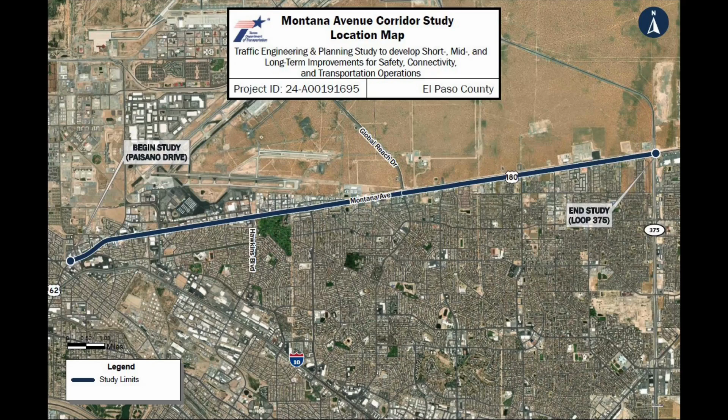Welcome to our first public series for the Paisano Drive and Montana Avenue corridor study with virtual and in-person options. We appreciate your interest in the study and thank you for your participation. The public meeting series has been convened to share study data and preliminary recommendations for the corridor and obtain your input. Please take your time and look through the public meeting material, and don't forget to send us your comments by phone, email, online survey, or mail with the provided forms.

Your input on the proposed improvements is valuable and will help benefit the community. Thank you for shaping the future of Paisano Drive and Montana Avenue.

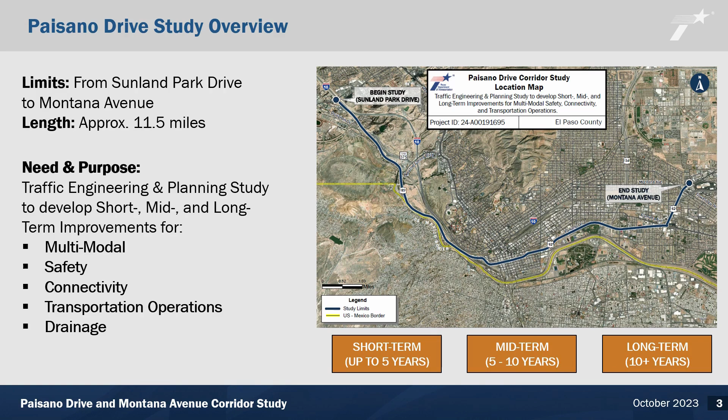The Paisano Drive study corridor extends approximately 11.5 miles from Sunland Park Drive to Montana Avenue, passing through downtown El Paso and under the Bridge of the Americas. The purpose of this study is to develop short, mid, and long-term improvements for multimodal, safety, connectivity, transportation operations, and drainage. Short-term refers to recommendations that could take up to 5 years for implementation, while mid-term refers to recommendations that could take 5 to 10 years, and long-term refers to recommendations that could take more than 10 years.

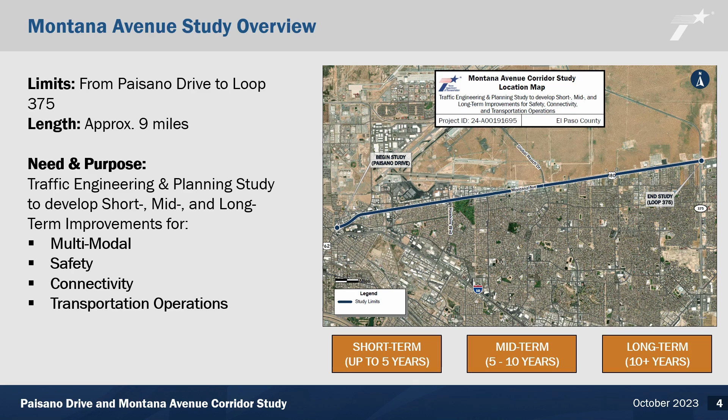The Montana Avenue corridor study extends approximately 9 miles from Paisano Drive to Loop 375 at Joe Battle. The purpose of this study is to develop short, mid, and long-term improvements for multimodal, safety, connectivity, and transportation operations. Short-term refers to recommendations that could take up to 5 years for implementation, while mid-term refers to recommendations that could take 5 to 10 years, and long-term refers to recommendations that could take more than 10 years.

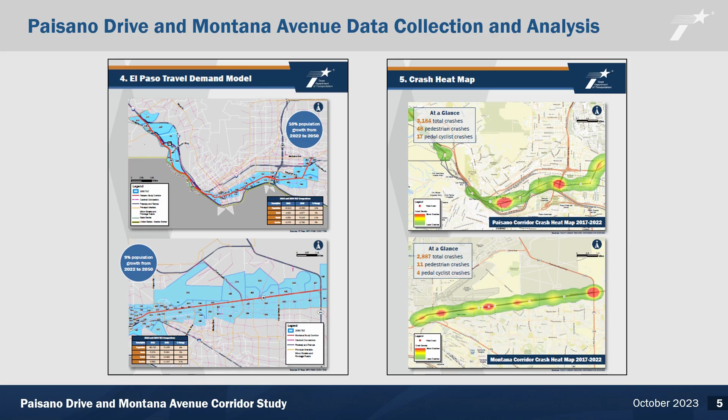Existing conditions and data collection for the Paisano Drive and Montana Avenue corridor study, including population growth, crash statistics, and bike and transit information, can be found at the public meeting boards. As a preview to some of the recommendations found in the recommendation roll plots, Paisano Drive from Coldwell Street to Durango Street was identified as a major fatal crash location due to its sharp curved geometry. Some of the short-term recommendations for this area include installing curb and pavement markings, as well as transverse rumble strips and speed pavement markings to slow down traffic taking the sharp curve too quickly.

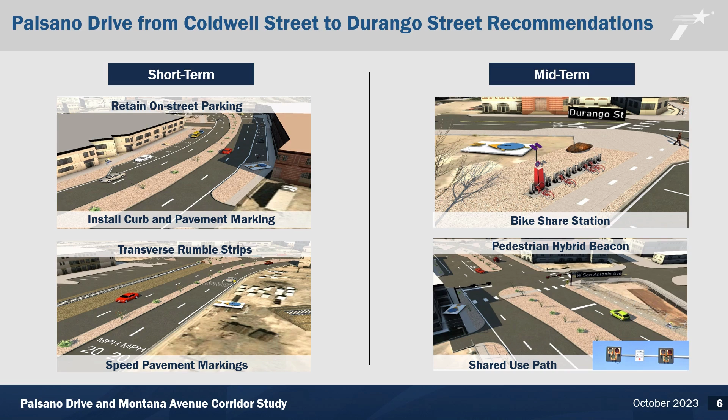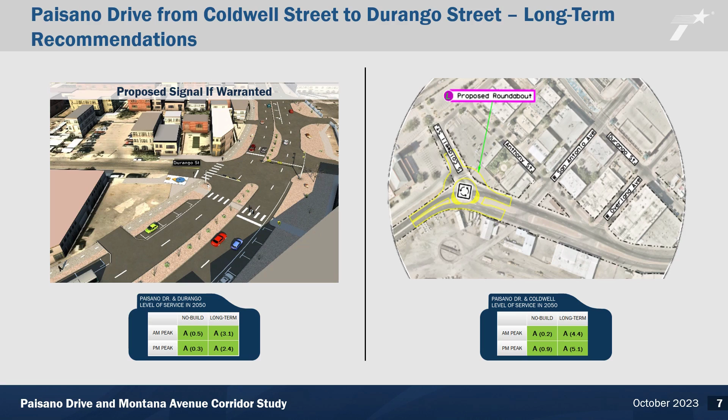Mid-term recommendations for this area include installing pedestrian hybrid beacons at San Antonio Street, Overland Avenue, and Durango Street, and a shared use path from Coldwell Street to El Paso Street. A potential bike share station is also proposed at Durango Street to encourage safe pedestrian and bike activity. Two long-term recommendations for Paisano Drive between Coldwell Street and Durango Street are to realign the curve within the right-of-way to reduce curve radii and to add a signal at Durango Street if warranted by future traffic volumes. An alternative long-term recommendation for this area would be a roundabout at Coldwell Street to slow down speeding vehicles heading west toward Coldwell Street.

The Paisano Drive and Delta Drive / Virginia Street intersection was identified as a location with unusual intersection geometry and a high number of crashes. The midterm recommendation for this location is to add a hooded left turn from westbound Paisano Drive to Virginia Street and only allow right turns to and from Virginia Street and Delta Drive.

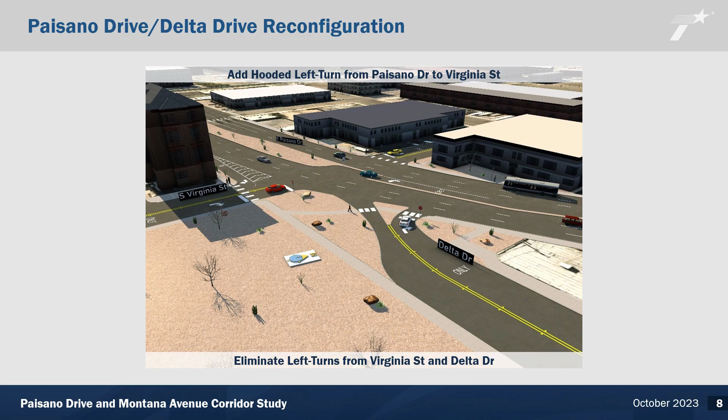Vehicles wanting to travel west from Virginia Street and Delta Drive will be directed to the traffic signal at St. Vrain Street, which is 1 block east.

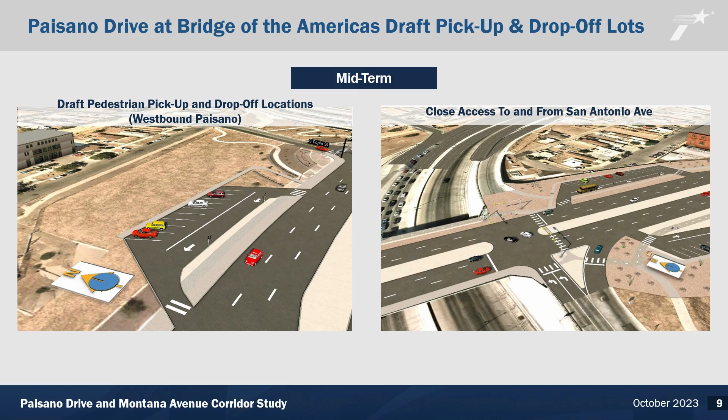On Paisano Drive at the Bridge of the Americas, potential pedestrian drop-off and pickup areas are recommended in the northwest, northeast, and southeast quadrants. Due to recent lane geometry changes, San Antonio Avenue has vehicles traveling north to merge onto I-110. Since San Antonio Avenue only connects to the neighborhood community, the midterm recommendation is to close access to San Antonio Avenue.

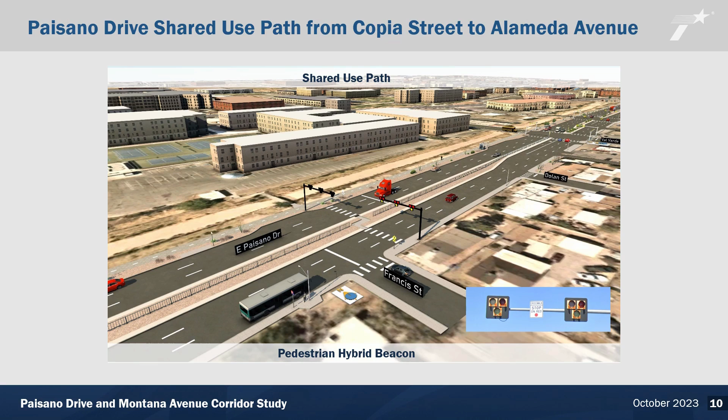Another midterm recommendation for Paisano Drive is a shared use path on the northern side from Copia Street to Alameda Avenue, connecting 3 schools, the zoo, and the Bridge of the Americas for multimodal use. In this area, we are also proposing 2 pedestrian hybrid beacons at the locations of existing pedestrian bridges, which are proposed for removal. The beacons would allow school children to cross safely without the underused pedestrian bridges.

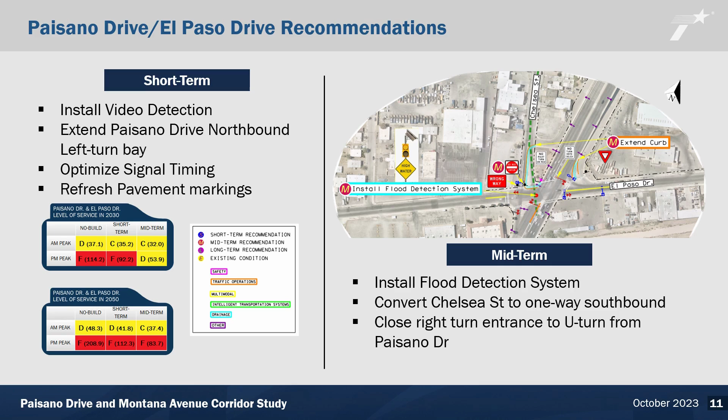The intersection of Paisano Drive and El Paso Drive has an atypical geometry and high delays. To improve the intersection, we are proposing installing video detection, optimizing traffic signal timing, and extending the northbound left lane in the short term. The midterm recommendations include closing northbound access on Chelsea Street and closing the right turn entrance to the U-turn from Paisano Drive.

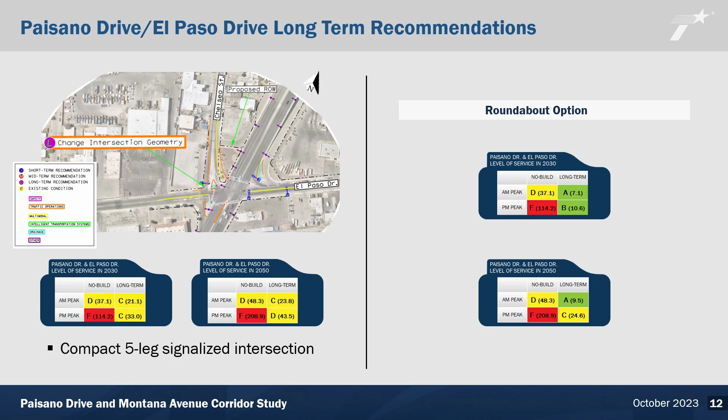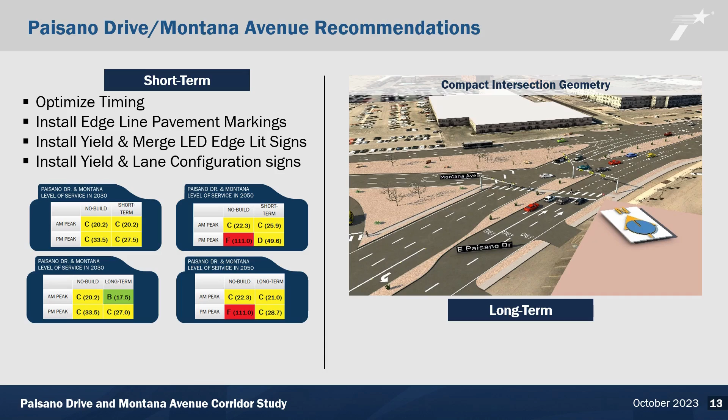At the Paisano Drive and Montana Avenue intersection, the short-term recommendation is to optimize traffic signal timing and install edge-line pavement markings and signage. The long-term recommendation is to add an additional signal pole and consolidate the intersection geometry to allow for pedestrian movements. Montana Avenue and Buffalo Soldier Road recommendations include removing overhead railroad flashers. It also includes midterm recommendations of adding an additional northbound left turn lane and extending the curb west of the intersection to create a hooded left turn.

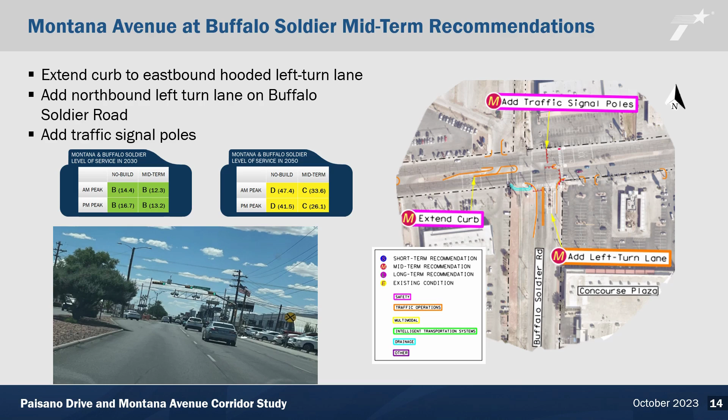A long-term recommendation to help with the capacity at major intersections along Montana Avenue is a below-grade bypass lane at Buffalo Soldier Road / Airway Boulevard and Hawkins Boulevard / Mattox Street. The bypass lane would allow through traffic to bypass the traffic signals by going through underground lanes. The intersections themselves would remain similar with turn lanes.

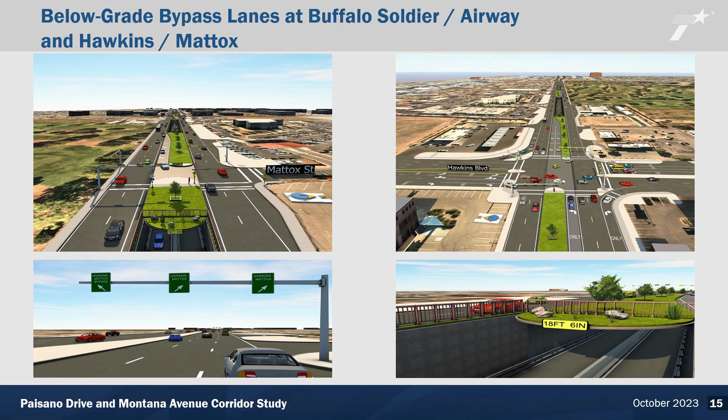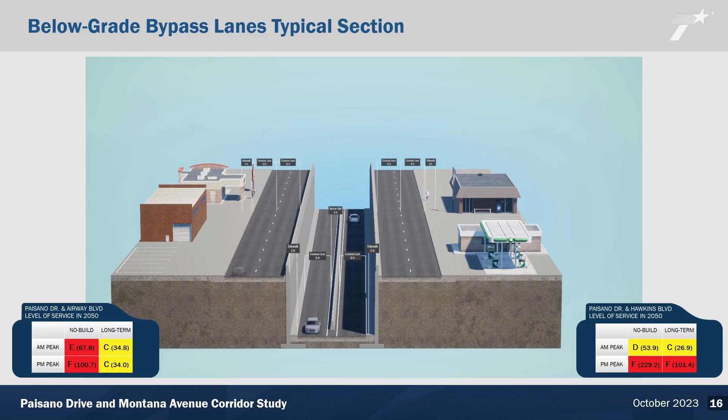This project was kicked off in August 2022. On November 3, 2022 and May 24, 2023, agency work group meetings were held and attended by over 100 stakeholders. The first public meeting series is being held October 17th and October 18th, 2023, with a virtual option. We will reconvene next spring with our final agency work group meeting and a second public meeting series. The draft corridor study report is planned to be submitted in spring 2024 with a final submittal in summer 2024.

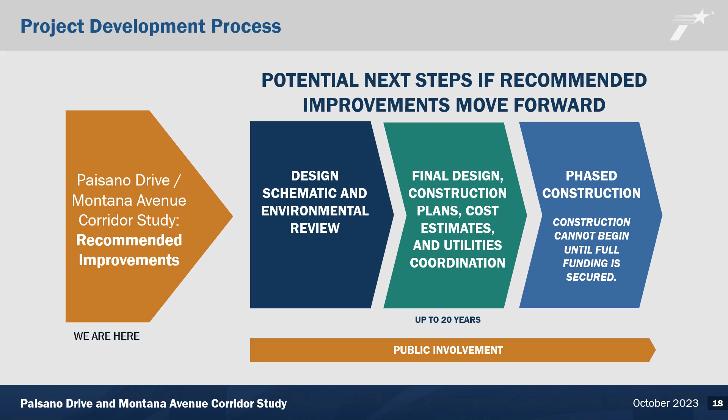We are currently in the corridor study stage of the process, where we're focused on data gathering and preliminary analysis to assess the practicality of short, mid, and long-term recommendations. Should TxDOT decide to proceed with the study recommendations, the projects must go through TxDOT's project development process. Several major tasks and more opportunities for public input would follow before construction could begin, including identifying funding for the projects.